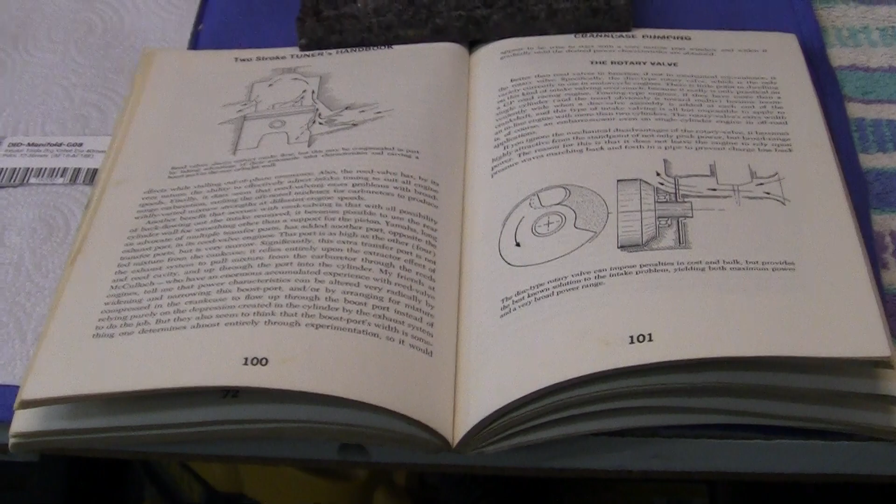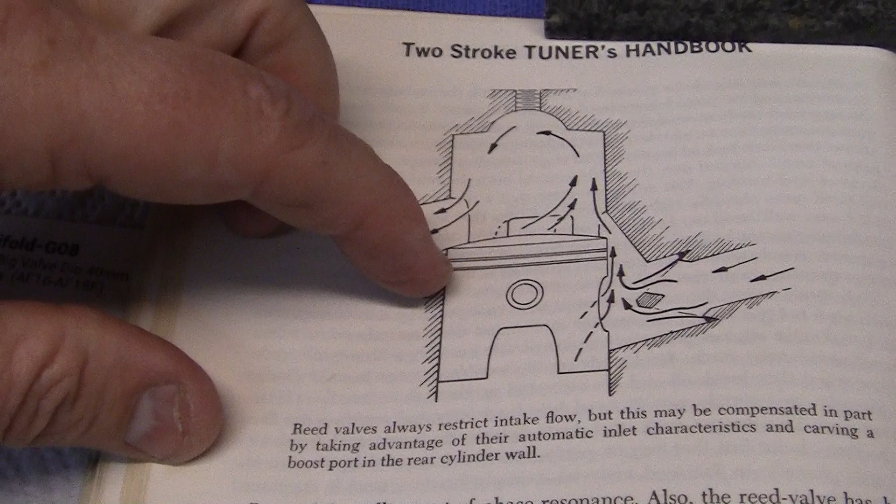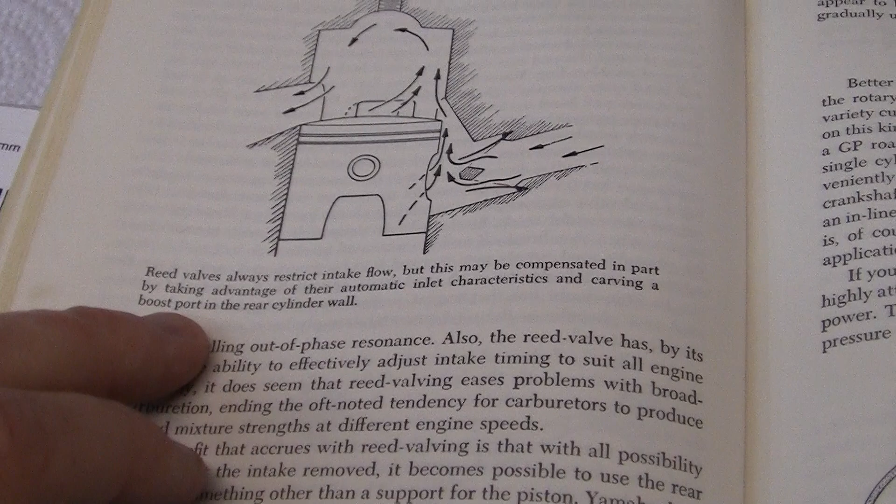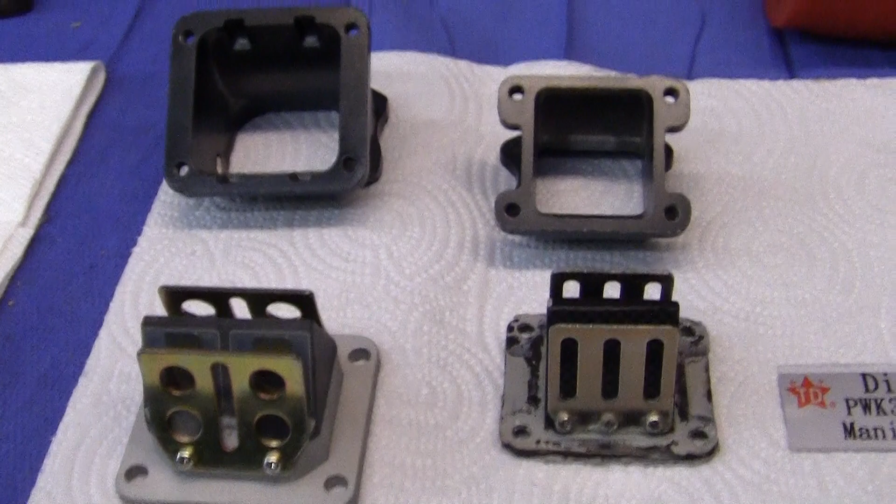I've taken my two-stroke tuner's handbook, and we're looking right now at the cylinder, the fuel as it comes into the engine and goes through the reed valves, and then goes into the combustion chamber and out the exhaust. It says the reed valves will always restrict intake flow. Well, they do, because they're not an open thing like this—they have this block in the middle of them. Now, there's a couple things wrong, according to the books, with these big reed valves and the small ones and everything else.

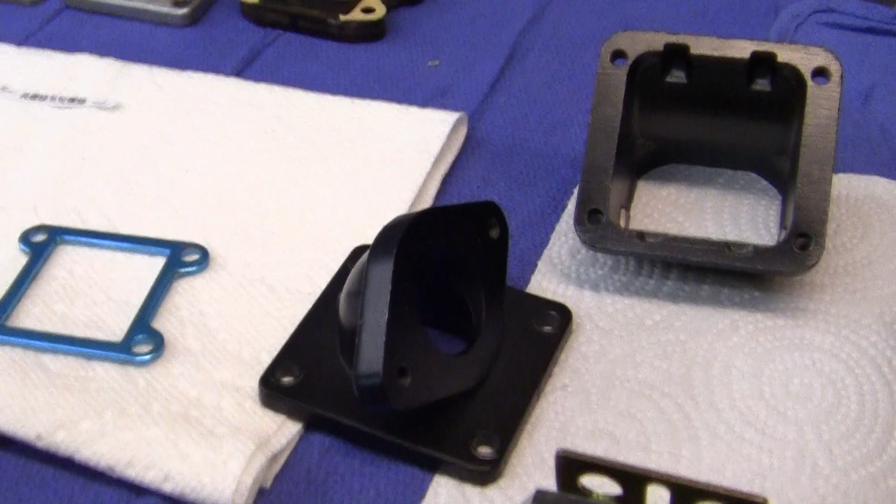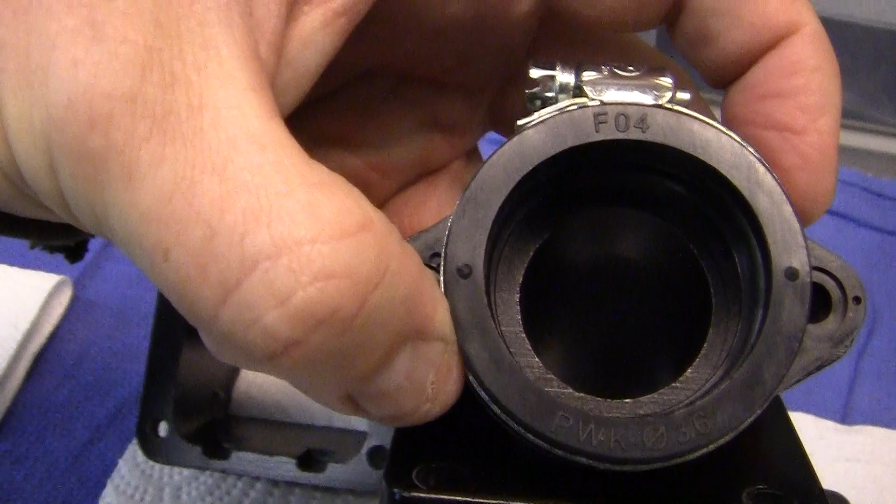This right here is the intake for the big carburetor. It goes right here on the brand new Taida. To attach this to the carburetor, we need this giant rubber spigot. What I'm going to do is put the rubber spigot here and show you this point blank. The rubber spigot is put right over the intake, and you can see there's a smaller hole in here, and that restricts airflow.

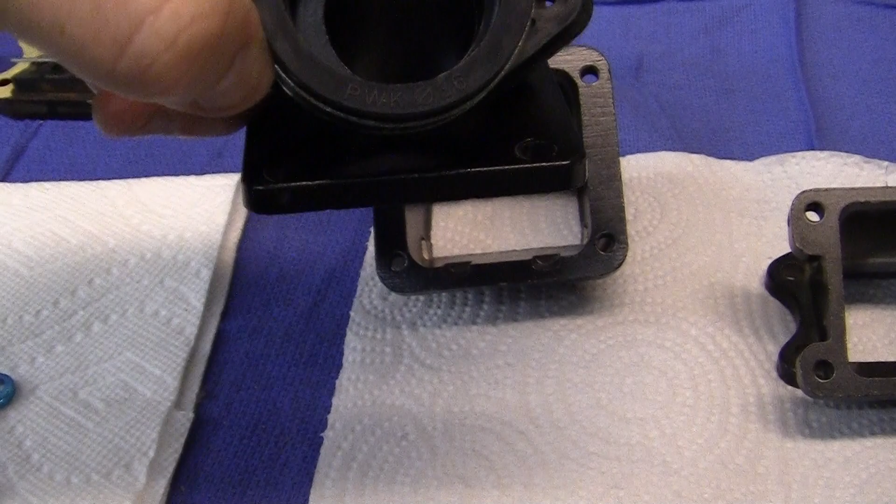So what I did was, last summer I took my CT intake, which basically has the same characteristics as the larger one, except the base isn't as large. Now what I did was I took the 36mm rubber boot, and when you put it up to the brand new one, you can see that it's got a restriction there.

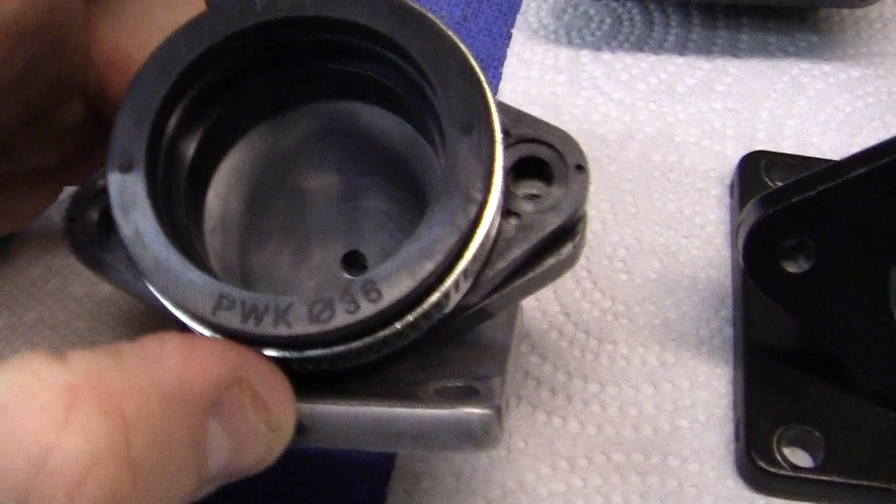If you put it next to the one that I've been working on, you can see where I've widened the hole out, the intake, to where it can have a better flow. You can see up through here, and over here and over here. It's kind of hard for me to do—it's cold in this shop and my hands are old.

So this is a problem that I see with this Taida big intake. According to the two-stroke tuner's handbook and Graham Bell's performance tuning, if we look at this through a big picture—let's say that this garage right here is the inside of this large intake, this Taida large intake. We've got a whole bunch of air coming in, a whole bunch of air coming out.

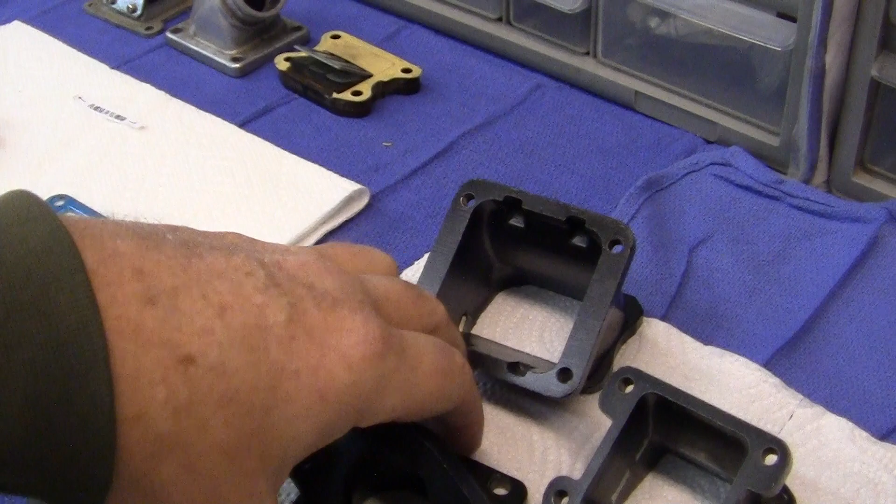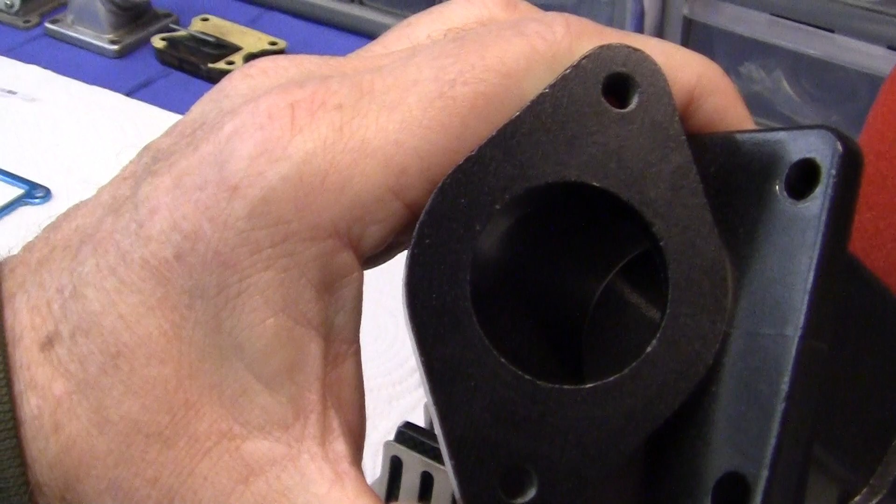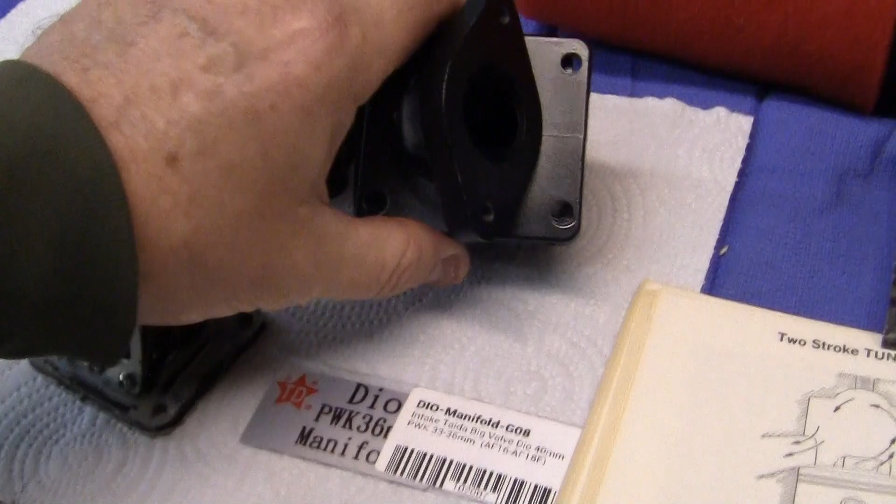The problem is, when we hook up the metal intake right here, according to the books, this valve is only as good as the smallest port in the valve. As you can see, you've got all this room, and you only have this little tiny black diameter hole right there.

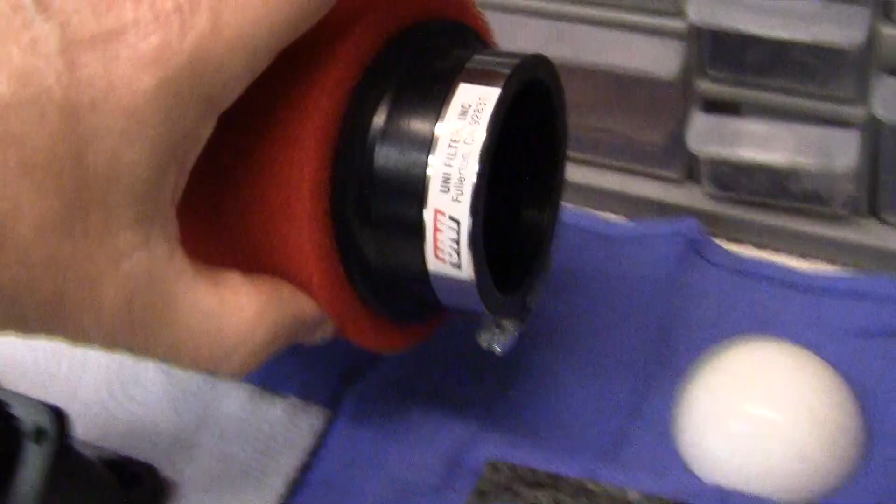So you can have the biggest carburetor in the world, say like this is the carb, and your intake is right here. The book says that your carburetor is only going to be as efficient as that hole right there. So that's one problem.

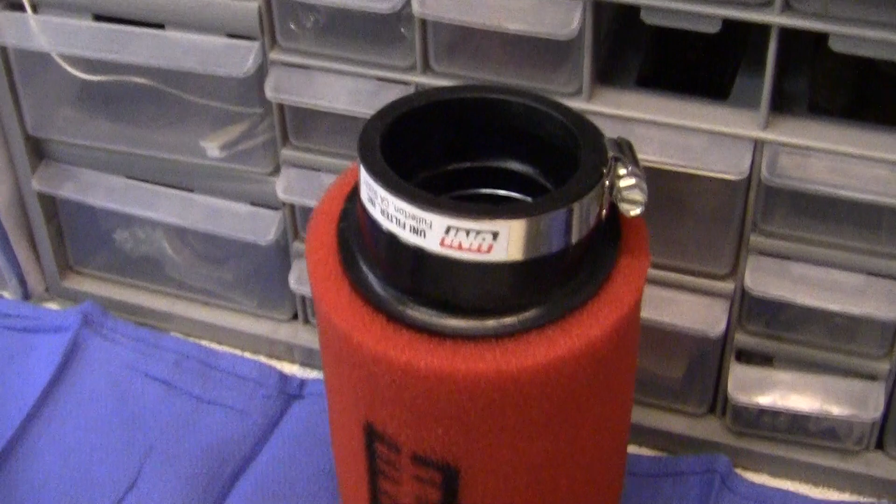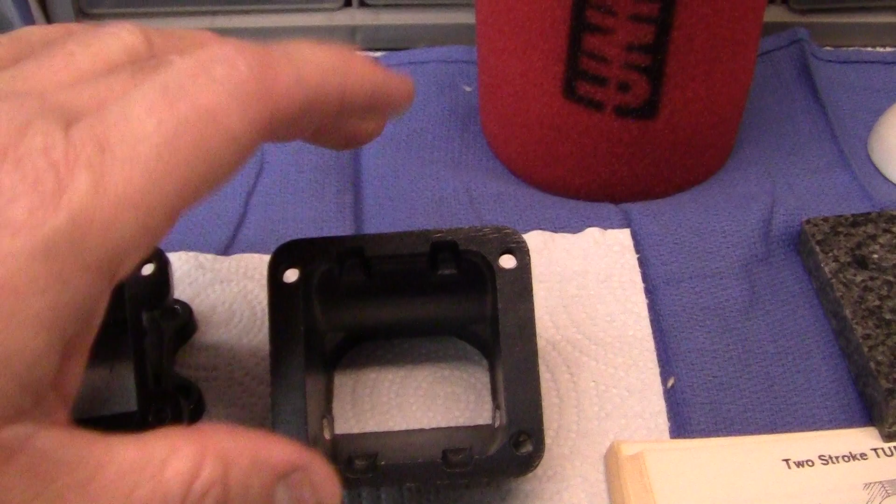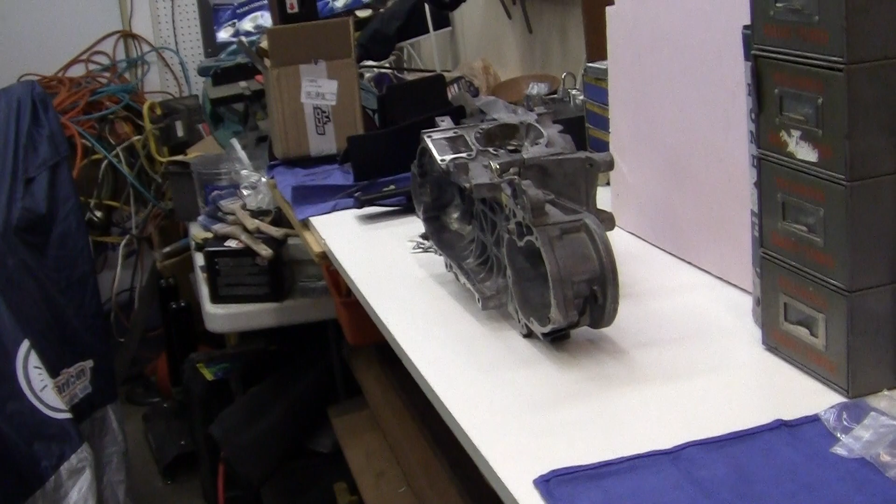So what I'm going to do—I thought maybe I could take this polished one and stick it on the big reed intake right here, but it won't work. I thought I might be able to do that. What I'm going to have to do is take this CT and this Taida big valve I just got in, and widen this hole for better flow, like this one right here. It does take a while to do, but it's kind of well worth it.

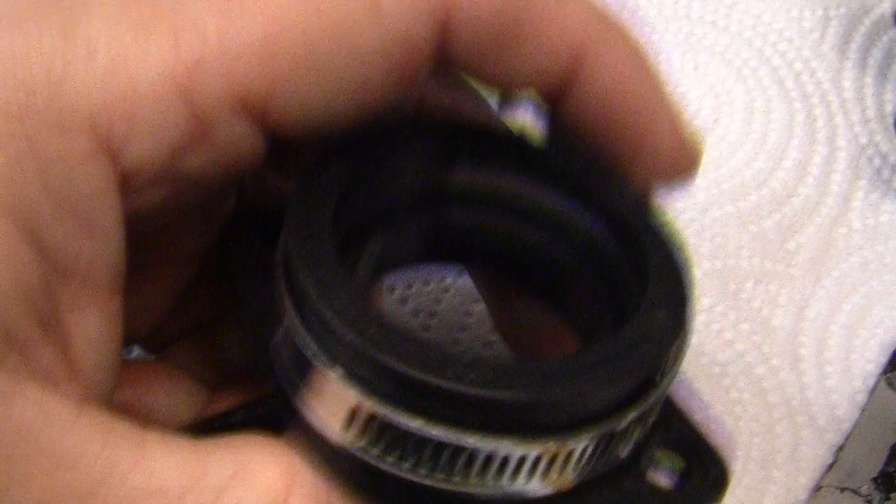What you do is you'll take the spigot for 33, which is here, and we'll put it on. Hands are cold, sorry.

I don't know how to edit, so these videos will take a while. But if you got nothing better to do, you know, except for catching the coronavirus and sitting on your hands, this might be interesting.

So what I do is I etch a line right on the inside of the black metal, and then I take this off. I get out one of my Dremel grinders and start to slowly widen the hole right here, so that it's... I wonder if I do it this way and show you, give you an idea. If we took it like this, right?

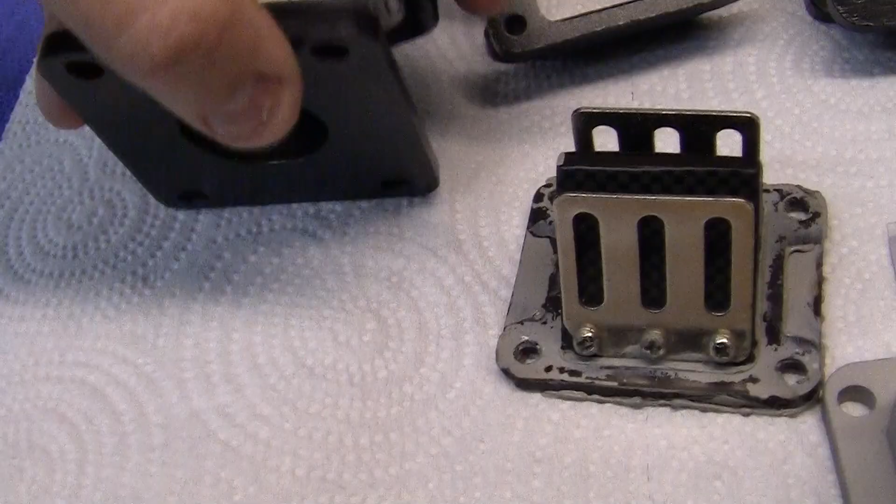I don't know if we can see it that way. Oh, maybe not. Anyway, I think you get the idea.

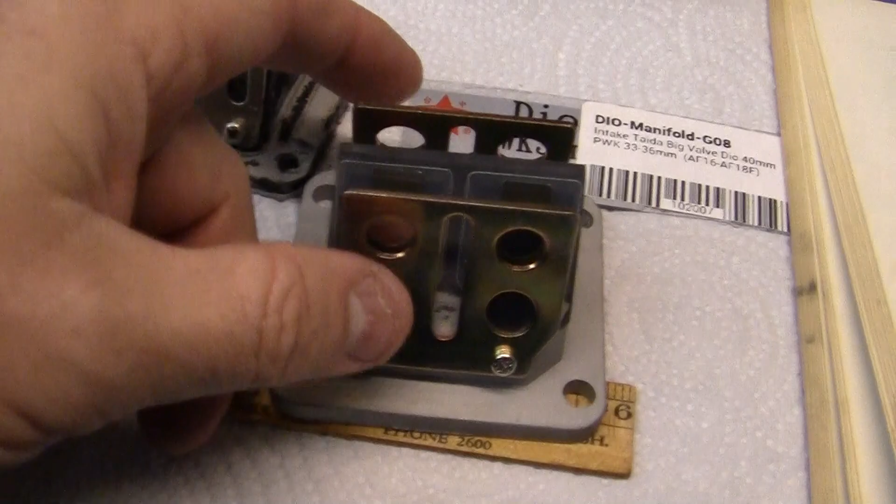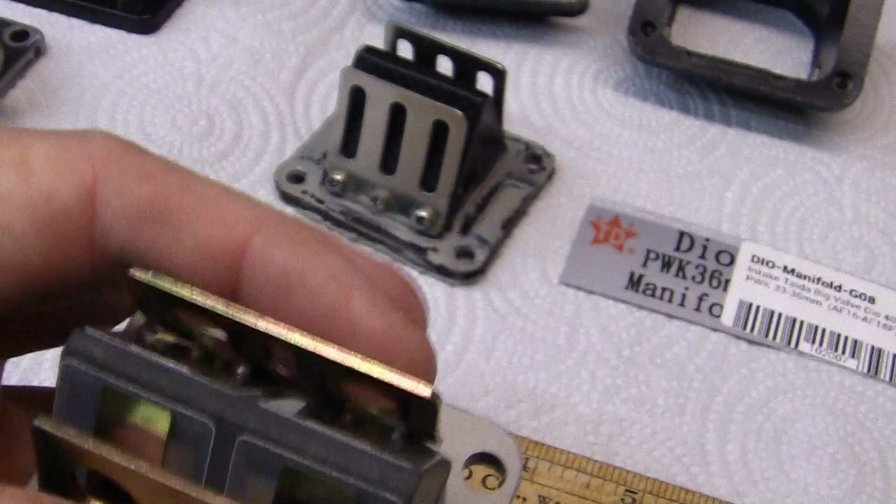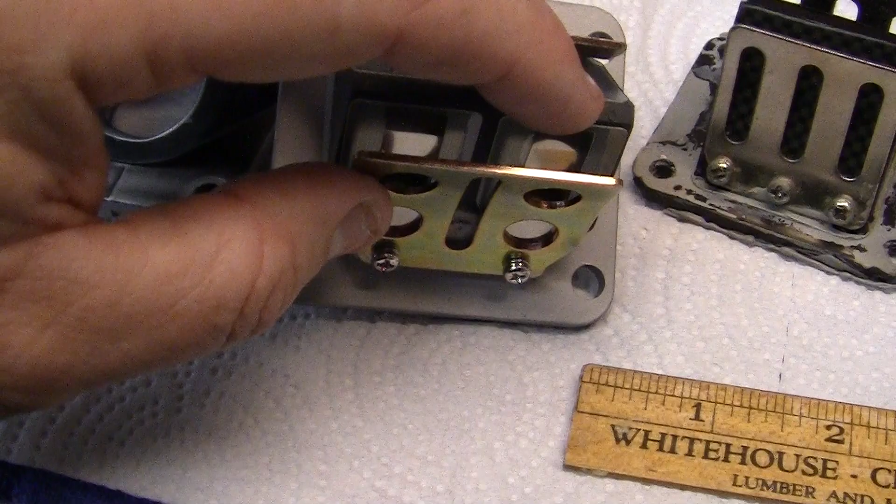Another thing I'm going to do with this big intake is tear down this reed cage and readjust it, just to make sure it's okay. Another problem I have, maybe someone out there can help, is that on this CT cage there is no metal spring. These are metal spring stoppers, which keep a crisper response on the reed valves, keeping them opening and shutting very well.

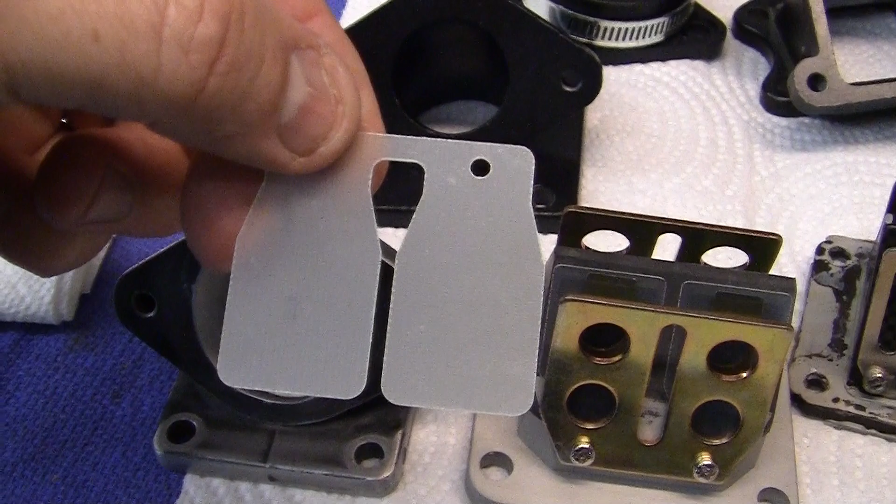What I found in my CT ones, and all the rest too, is that they come with these small metal springs. Problem is you'll be riding along, everything fine, then suddenly you hear a small stutter. You get home, take this apart, and one of these is gone. The metal fatigue at the very base causes them to get weak and get sucked into the cylinder, and it's a $700 or $800 cylinder that could be missing.

So I'm going to take these off because they're cheap spring metal, and if anyone knows where I can get a very good thin quality carbon spring metal to replace these with, I'd like to know if you happen to know any.

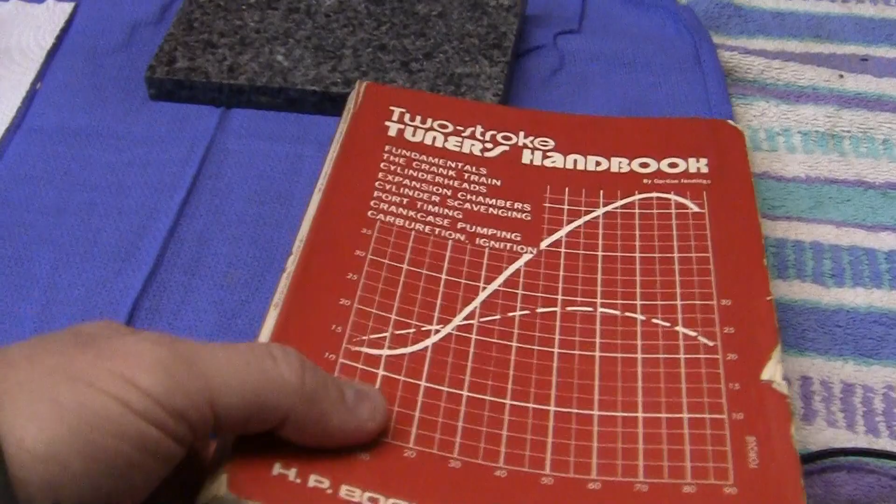And for all the young guys out there, everyone who doesn't have a mechanic handy to ask questions, this handbook, which came out in '73, was $5. This is the best two-stroke book I've found for beginners. The next one is...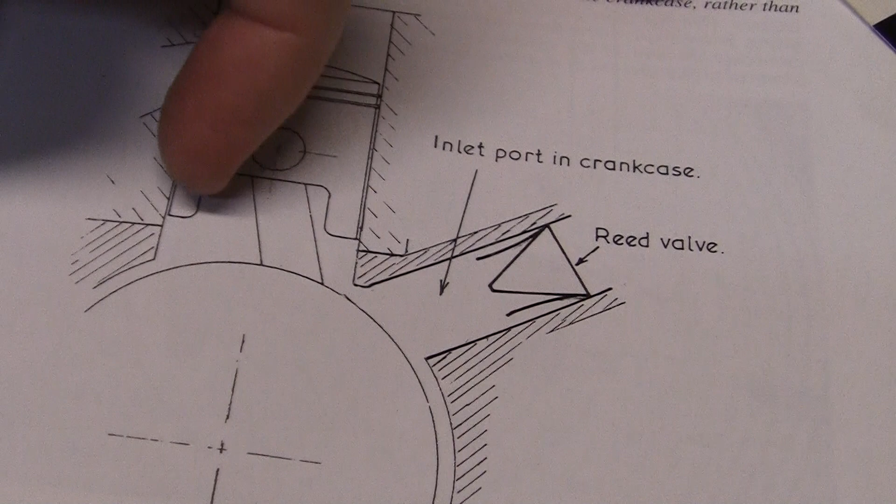Whoops, the two-stroke performance tuning book. This shows you the reed valve right here and where the inlet port is. As you can see, your reed valve is right here, and you can see your stops right there.

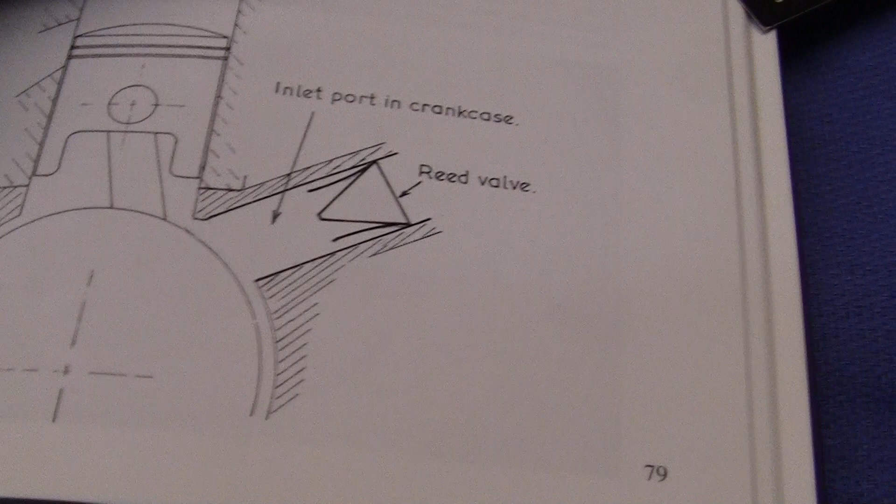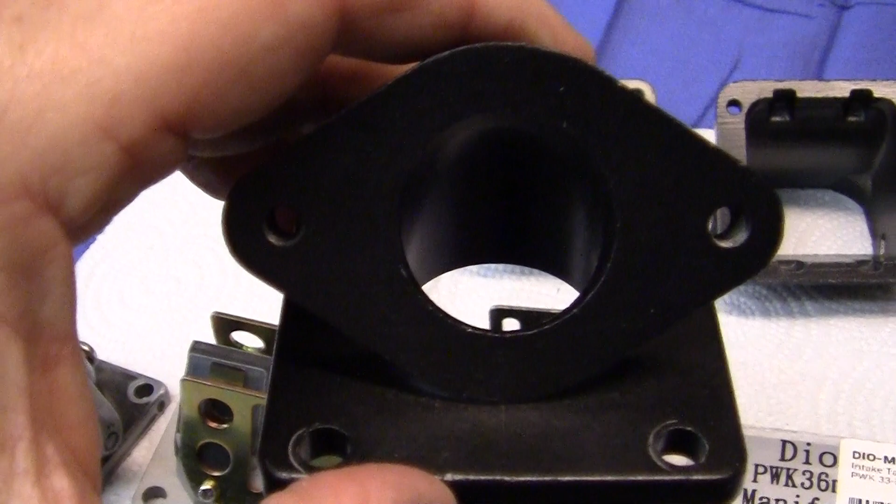The intake is just as big as the reed valve, whereas in the Honda Dio or Elite, the ports are very, very small. And according to the book, your power range and everything is only as good as the smallest part of the valve.

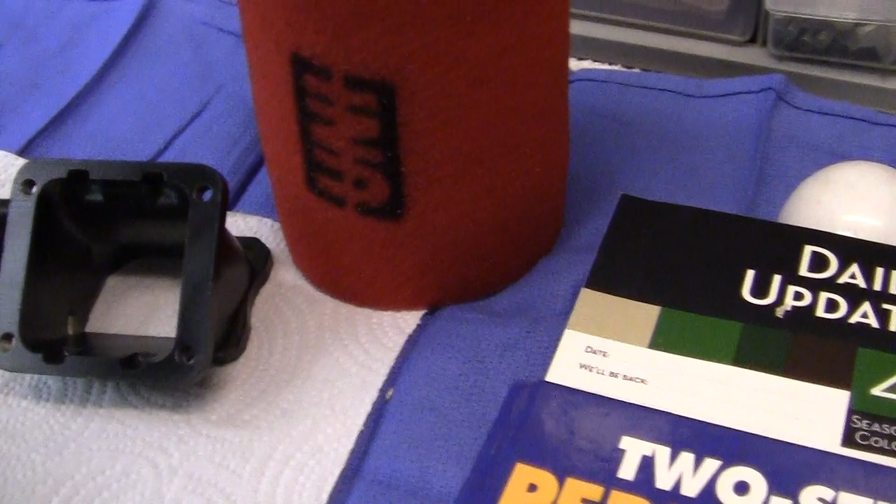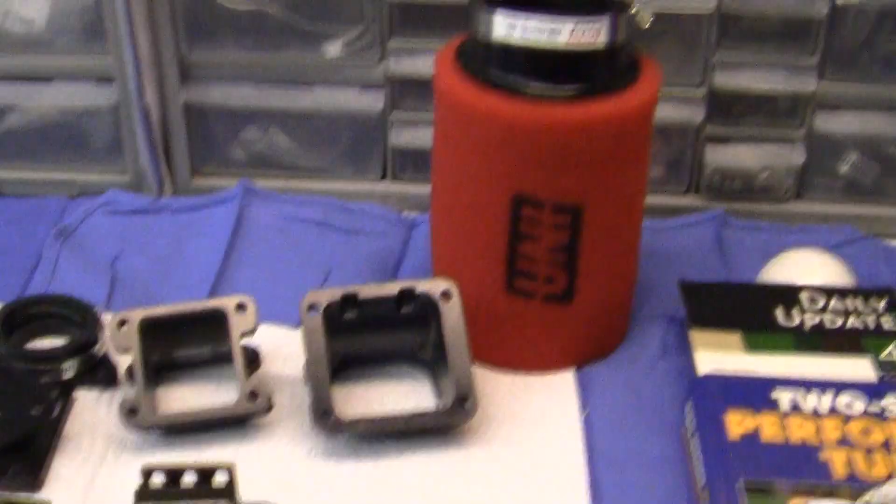So you could have an intake that's that big, okay? But if your inlet where you hook up the carburetor is only that big around right there, that is all the valve is good for. Everything has to be big and free-flowing to get as much fuel and air into the carburetor and through the engine and out the exhaust right here to create horsepower.

If you really work on making your engine a very, very efficient air pump, that's what it is, an air pump, then you'll get more power. And this is what we're doing, just adding little things here and there to do that.

So what I'll be doing is taking this intake manifold and making it as big as this one, and then I polish it. It's kind of fun to polish it. People say, oh, well it won't help, this won't help, that won't help, you can't polish them. Well, it makes me feel better. I'm old and I don't give a damn. Okay, next.